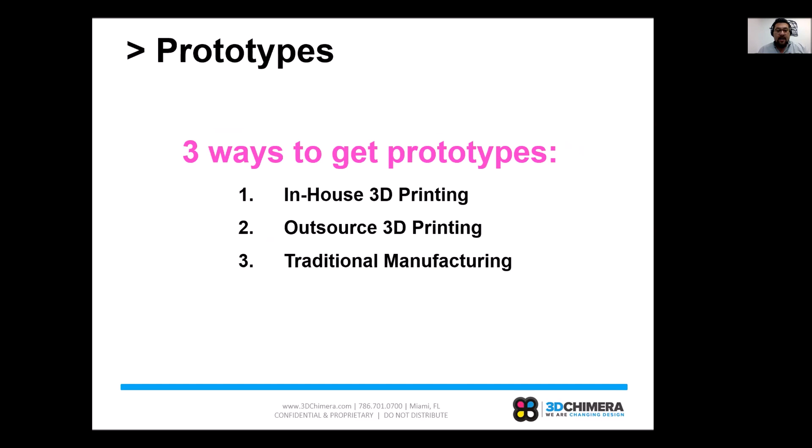Okay, so let's start with that first topic, prototypes. So in general, the way we look at it is there's 3 common ways to get prototypes. You can do in-house 3D printing, you can outsource 3D printing, or you can do traditional manufacturing. So traditional manufacturing is probably the most common. Most organizations out there have been doing this for years. It's kind of the way things have always been done.

So what does that look like? It's a Bridgeport machine, it's a milling machine, it's a CNC. Typically, these things require manual labor and manual programming. They usually require a highly skilled operator. So if your organization is large, perhaps that is a team that you have of machinists whose sole job is to work on these pieces of equipment and program the CNCs so that parts can get made. Perhaps you're a smaller organization, you might be outsourcing that expertise to a traditional house that's doing CNC type of work.

Now, what's tricky about that is the people who program CNCs have to be super skilled, which means that we've got to cover those costs as someone who's purchasing those services. In addition, it's a subtractive process, right?

So in traditional manufacturing, we're always starting with a block of material and removing material away, which means that we're effectively paying for waste material every time we buy a part. So there's a lot of hidden costs in traditional manufacturing that you might not see, but when you're buying perhaps a large block of ABS plastic for a CNC part, where you maybe only need fine details, but that's spread out over a large area, it can be a lot of material that's wasted.

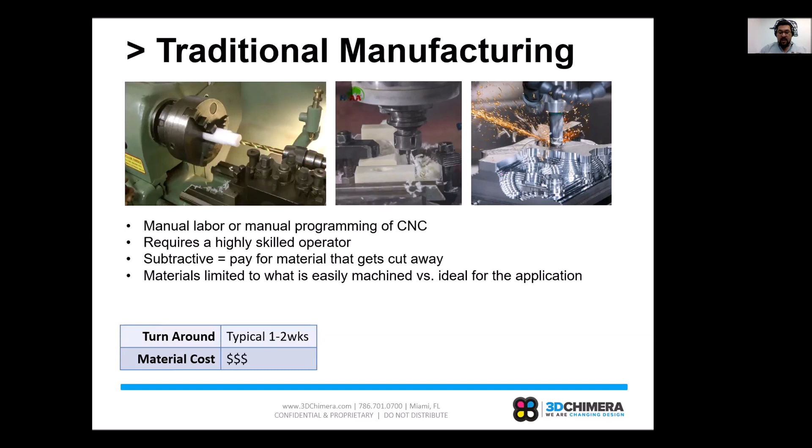And so we can flip that on its head if we think about how we can do that with additive, right? So we think about outsourced 3D printing. That's usually the first step that people do when they're starting their journey into additive. So you can work with service bureaus that are huge or small service organizations like 3D Chimera. In all of these places, the labor costs are going to come way down. So we don't have to have a CNC operator who went to university here to run 3D printers.

But the reality of working with any service organization is that that organization has to cover their overhead, and that is covered through service work. And so as you guys are outsourcing parts, you're effectively paying the overhead of another organization to do that. Typically, when you're outsourcing to a big company, they're printing on these super huge industrial 3D printers, which are awesome, but they have some shortcomings.

And a couple of those shortcomings are that you don't have as many material options usually, right? Because the service bureau is going to pick a few that work well for them to quickly turn projects. So you're stuck in that same spot that you might have been where you're outsourcing or even working in-house with traditional manufacturing, where you might not be able to look at the broad array of materials out there. And a lot of times these large industrial printers require proprietary materials.

So, of course, if you're working with 3D Chimera, that's a little different. We're a small team and we can be flexible and we can work with unique materials. But if you work with some of the bigger players out there, those materials are going to be proprietary. And what does that mean? That means that there's not a lot of options, but it also means they're not super cheap. So when you run these big machines, they work fantastic and they're very reliable, but the raw material costs are high and those costs get passed on to the customer when those parts are outsourced.

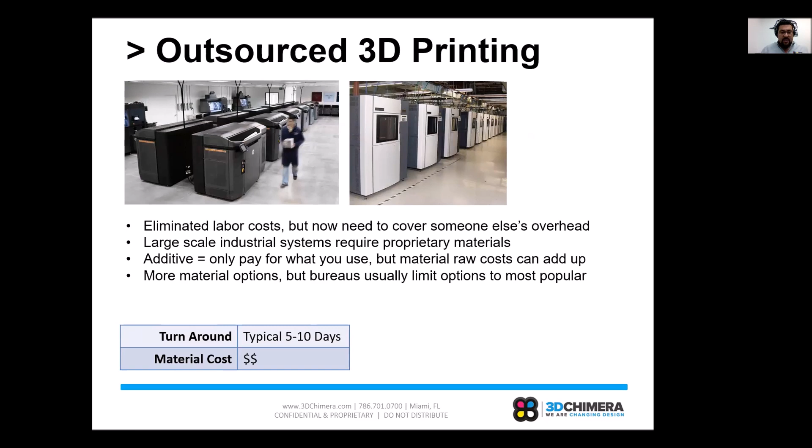So there are definitely advantages to outsource 3D printing, but there is another way, and that way is the way that we're usually the most excited about, and that's the idea of in-house 3D printing. So this would be where you probably dip your toe into the water with outsourcing. You figure out the type of technology you'd like to bring in. With in-house 3D printing, you can bring in a printer that meets your needs.

So here across the screen, we have a pretty big variety of printers. So on the left side, we have the German RepRap X500. That's going to be a high temperature material 3D printer. This is where you're going to print your ABS, your polycarbonates, your PEEKs, your Ultems. It's got a very large build volume. So this is a super flexible system for high temperature materials.

In the center, you have the Sintratec S2 3D printer. This is going to be an SLS 3D printer. So you're going to get the advantages of nylon or TPE powders, very fine details, and a pretty big volume here as well. And then on the right, you've got the MakerBot Method X and Method. Now these printers are fantastic. In the Method system, you're effectively getting the quality of an industrial 3D printer, but just shrunken down on a smaller scale.

As some of you guys might know, MakerBot was recently acquired by Stratasys, and so lots of that technology is actually implemented into the system. We're very excited about that today, and I'm sure that Camille will be able to highlight a number of different ways that technology might be able to help you guys in the future.

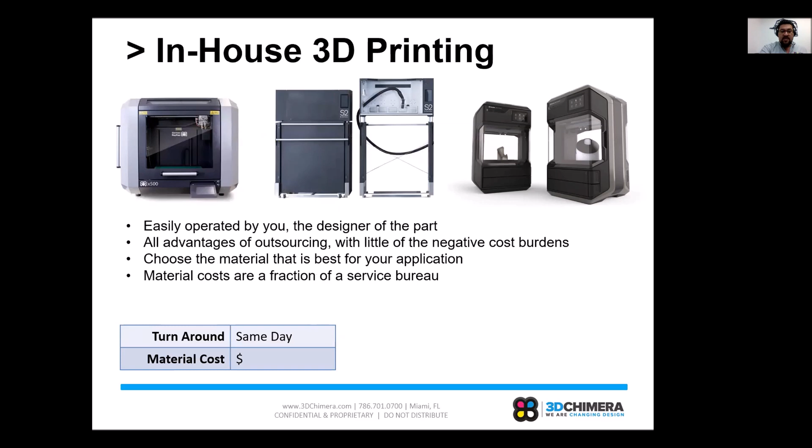There's another hidden benefit there, and that is that the reality is that in the open material market, materials are significantly less expensive. So you're going to be able to actually save money, not just by using only the material that you need, but actually only having to pay a fraction of what even the service bureaus are paying for their raw materials. So it can really be a huge advantage when you start to look down at the numbers for doing in-house 3D printing.

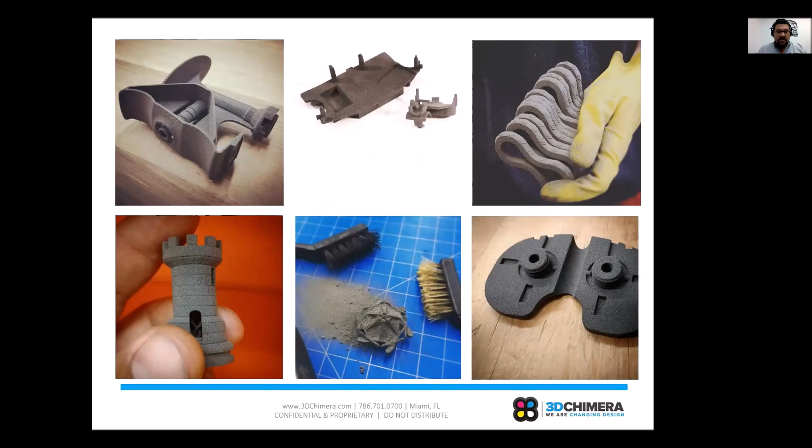So I just wanted to share with you guys a few examples of what 3D printed parts can look like. So here, these are all just detailed parts that came off of the SLS 3D printers from Sintratec. So these are going to be your PA12 parts. You can see really fine details here. It's a powder-based process.

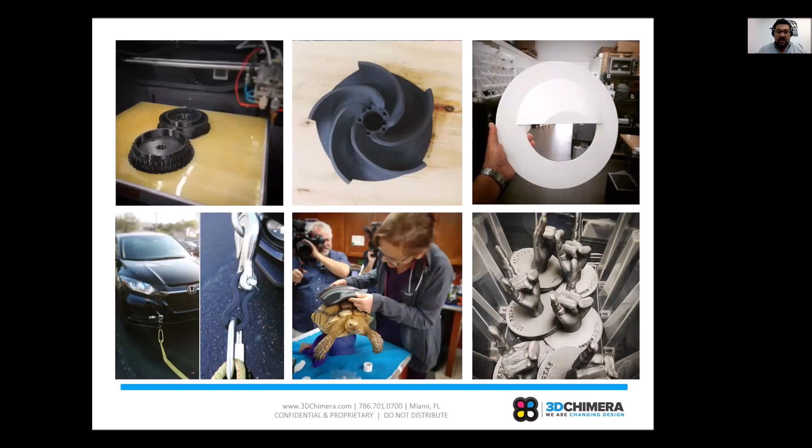And then these are some examples of the types of parts you can get off of your FDM or FFF style 3D printers. These are going to be your MakerBots and your German RepRap 3D printers. So you can see the variety of parts: parts for strength, parts for function, parts for fit checks, parts for aesthetics. There's a lot of different stuff that you can use it for.

So, as you think about how you can grow your business with prototypes, there's really two big things to think about. The first is a fast turnaround time, right? So if you can make more prototypes, that means you can iterate more.

That means you can build better products, right? It also means that you're going to be faster to market and you're going to have way less design risk, because you're going to have the ability to make more prototypes than just that one-off prototype you might have done with traditional manufacturing.

So, the big questions to look at in your organization are: what is it worth to reduce risk for your company? How much would a major mistake that you find in maybe your second or third round of prototyping cost an organization if you don't catch it? Additive can solve those types of problems and reduce that risk. Sometimes that's difficult to quantify, but try and think about that.

For your organization, have you ever had a time where a prototype could have found a mistake before it happened? We've had customers who have been able to identify problems that would have cost them entire containers' worth of materials ordered from overseas that would have been scrapped. They catch those things early in the prototyping stage so that when they get parts back, they're exactly what they expect.

And if you're thinking about time to market, what is the value of being first to market in your industry? If you're working on something new, you can iterate faster. Your competitors are taking weeks to build their prototypes, and you're building them overnight. You're going to hit the market faster, and that's going to give you a larger share of the market right from the get-go. So think about what that is worth for your team, and would an investment in additive allow you to unlock that potential?

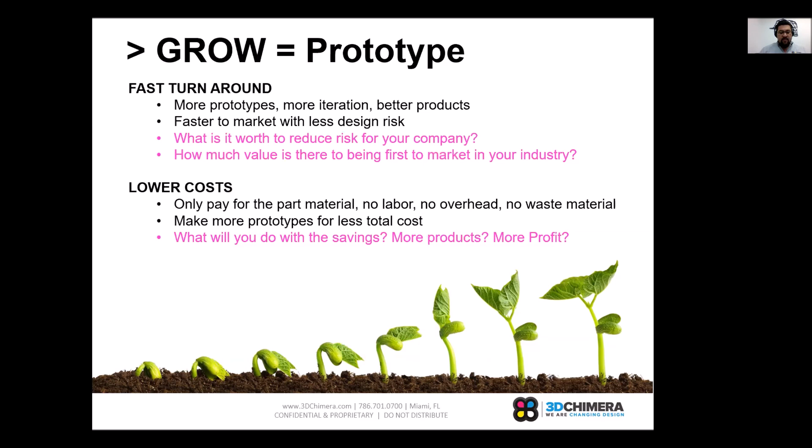So moving on to the next topic, let's think a little bit about tooling. In tooling, there's a whole variety of things: you've got tooling, jigs, and fixtures. The old school way is similar to how we prototype. With traditional manufacturing, you're going to have those long turnaround times, high costs, and high labor involved.

And today with additive, we get all those benefits we were just talking about with prototypes: fast turnaround times, lower costs, and low labor costs. But what's really interesting, maybe the most interesting thing, is that now we can focus on the new materials that are out there to build our products from.

Carbon fiber reinforced materials, nylon reinforced materials, electrostatic discharge (ESD) materials, materials with super high temperature ranges or super high chemical resistivity, perhaps parts made of polymers that are optimal for non-marring a surface or protecting a surface during a check fit. So there are a lot of hidden benefits to utilizing additive, particularly additive with polymers, in tooling, jigs, and fixtures that sometimes fall beneath the radar.

A lot of that's because in traditional manufacturing, we send stuff out for tooling. Those tools are usually made out of steel or aluminum, and that's great. It's durable and works well, but it costs a lot and takes a lot of time. With today's technology, we can actually produce parts out of polymers and get incredible results. So opening up your mind to implementing a polymer solution with additive for a tooling application can really change the game.

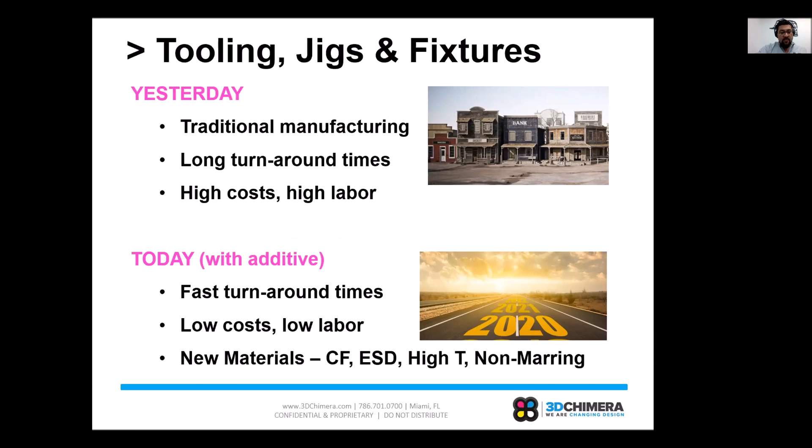So here are a few examples of where polymer additive manufacturing has been used to help with tooling, jigs, and fixture applications.

So on the upper left here, you have a casting application. So this is where you're going to 3D print the master pattern, and then you're going to do traditional sand casting, and you're going to be able to produce a part out of metal.

But instead of forming that master pattern out of a CNC component, or sometimes those are made out of like a handmade tool that then is done with a wax form, we can actually just 3D print those parts on demand, and then we can cast our parts and get functional metal parts on the other side. So you don't have to really completely change your process. You're just simply replacing a component of that with additive.

So to the right of that, we have another really interesting application, and that is for vacuum forming. So a lot of organizations use vacuum forming. It's a great technique because the materials are super inexpensive, and you can get some very interesting shapes and geometries just by simply heating a sheet of plastic and sort of sucking it down. And what's really cool about additive is that we have materials that can withstand those temperature ranges of those hot sheets of plastic coming down.

So maybe you don't need to fabricate that tool out of aluminum. I see some companies using MDF and wood that's sort of stacked up and that they're kind of hand shaping. How much more precise could your vac form be if you were to design that in a computer, design that tool, and then 3D print it?

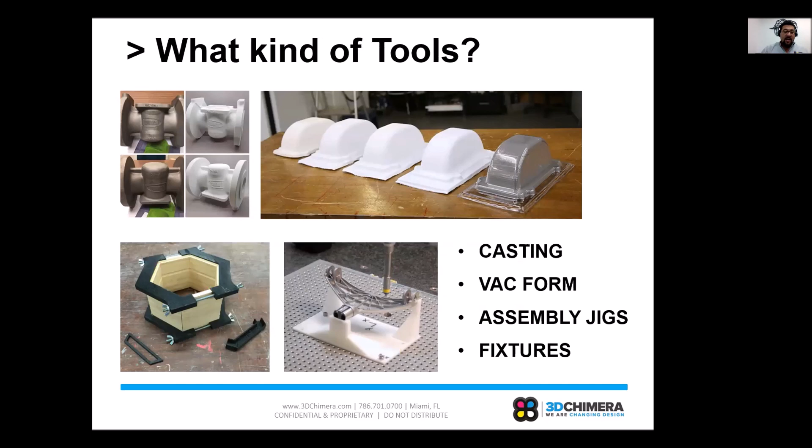So the low cost of additive can open up the applications for assembly jigs and fixtures where organizations maybe they're producing them traditionally, but oftentimes the organizations we work with weren't using them at all. And so by implementing additive, they're sort of enhancing their traditional manufacturing process as well. So it's a great way to think about modernizing your manufacturing process as we think about growing with tooling here.

Tooling wears out, right? So we can replace that with low-cost parts, right? So now all of the components that we've been dealing with that have been steel and aluminum, or maybe they're made of wood or some hand fabricated stuff from back in the day, we can replace all that stuff with components that are inexpensive with additive.

We can also produce tooling on demand, so there's no ramp-up time needed. If a part breaks, we can produce a part overnight. So think about that: if a tool was to break on the production line and the whole line shuts down, what does that lost productivity cost your company now?

If you lose a day of productivity, it's usually not the cost of the part. The cost of the part is irrelevant. What I've seen with my customers is when a tool breaks down, they will expedite that, they will rush order that, they will overnight that part because they're losing thousands of dollars an hour, because that part doesn't exist. If you can produce that part on demand, you can get it the same day, the next day. What is that worth? It could be worth huge amounts of value to your organization.

In old tooling, often we have workarounds because there's no easy way to reproduce it. So you have a tool, but there's something that you've kind of built by hand that kind of works with it, and it's not super efficient, but it gets the job done. With additive, we can actually build the ideal tool. We don't have to compromise and use what we've got. The ability to produce parts is now inexpensive and quick.

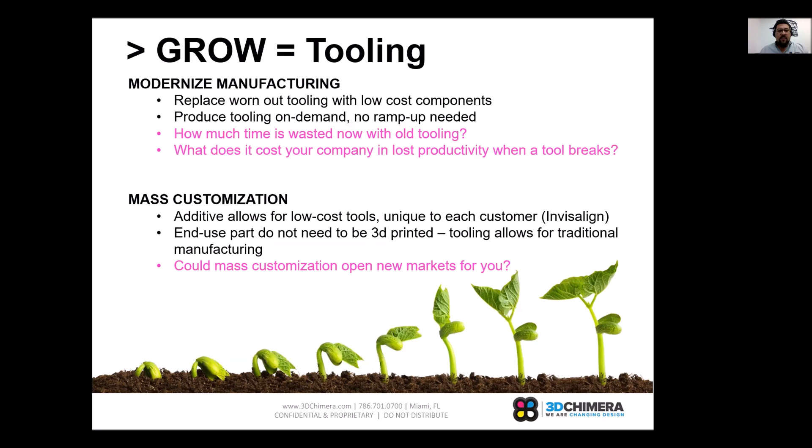And then finally, the idea of using additive to reduce inventory. Traditional warehouse: if you're working in a company that has products, everybody's got a room that looks like this. It's shelves, it's bins, it's bags, it's labels, it's confusing, it's expensive, it's a large amount of square footage. What if we can replace that with just-in-time manufacturing? Customer orders a part, we make it and send it to them next day. You can't get much more efficient than that.

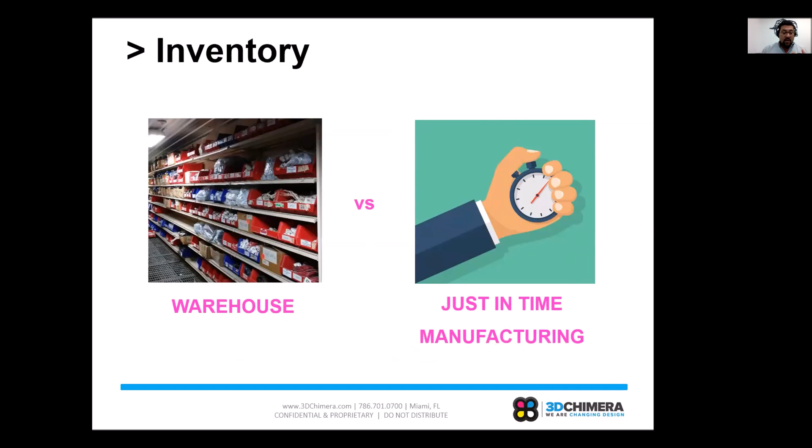That means we eliminate holding costs, inventory costs, even square footage costs, warehouse space. Of course, it allows us to free up cash. All those carrying costs are gone. We're just producing parts with additive, which could actually be less expensive than some traditional manufacturing. What could that cash flow do for your business? Our organization is a small business. What matters to us is cash flow. That's how we survive. A lot of businesses operate like that.

If you can increase your cash flow, could that help your business? Could you have that cash available to invest in other ways, so it doesn't get invested in inventory sitting on the shelf that maybe one day will come back to you? Or can you free up storage space? If you can get rid of all those shelves, can you increase your productivity on your production line? What is that worth? What is a square foot of productivity worth for your organization?

So these are some of the big picture ideas that we like to have folks think about as you're considering bringing in additive. Hopefully these three different ways can help you open your mind and see perhaps some unique ways that additive might help you grow.

What I'd like to do now is give you a quick demo and tour of our office, and then I'll flip things over to Camille. If you have any questions, this is a great time to type those in. I'm going to grab my laptop and walk you around our office here a little bit.

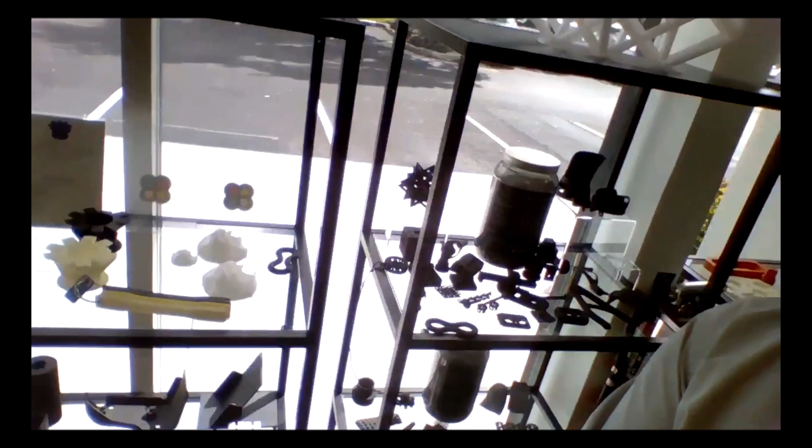We got all sorts of really innovative and interesting sample parts here. So here's a lot of SLS parts, all sorts of detailed parts and applications. Here's a lot of FDM parts over here that you can start to see there. We've got one of the new Sintratec S2 printers over here, which we are super excited about. So if you're looking to do large scale SLS, we've got that in-house.

Back here, we have some of our German RepRap 3D printers. For those of you guys who've been on some of our webinars in the past, you've probably seen me go into the back. We're not going to do that today, but we've got the giant printers, the X500 and X1000 as well. Then up here is the newest addition to our team. This is the MakerBot Method X.

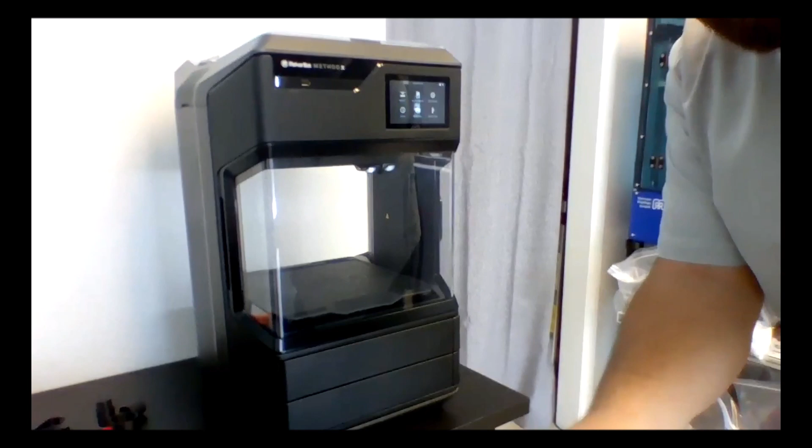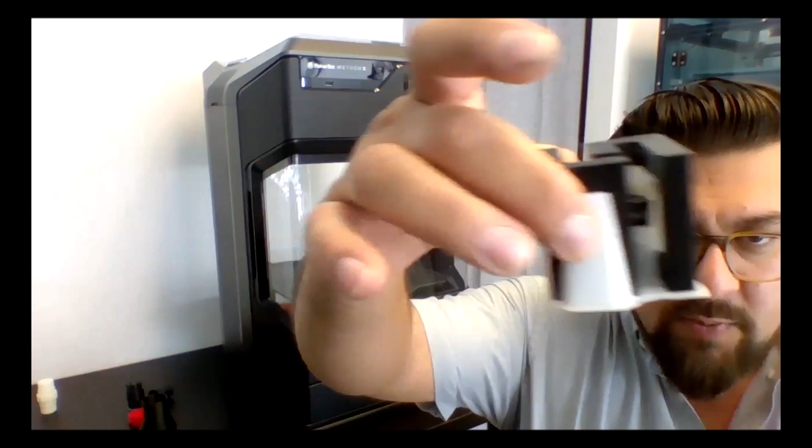So I wanted to show you guys this in person. I know that Camille will be giving us a little bit of a tour of it digitally, but it's always nice to see in person. I wanted to show you guys some parts here. This technology is really, really cool. So, we're still producing FDM parts like we traditionally have done with a lot of our printers. But what's unique about this system is that it has an incredible ability to produce support, right?

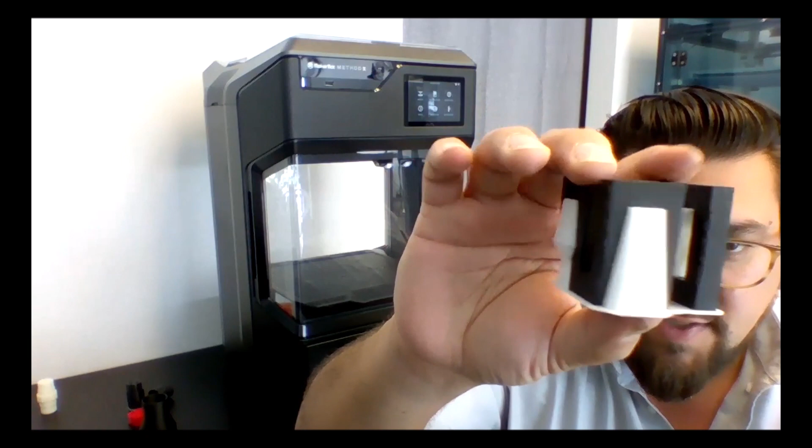So for those of you guys that are familiar with additive and have maybe worked with Stratasys machines in the past, this will look familiar to you, these types of complex support structures that dissolve out. This is actually the same dissolvable support that's used on the Stratasys machine. So if you've got a Dimension 3D printer or you've got a Fortus 3D printer and you guys are dissolving support out of that, the SR30 material, same thing runs on this guy, right?

So from something like this to something like this, the surface finish is incredible. The quality is incredible. You're going to find that it's going to be your go-to 3D printer. Even we were surprised. We were excited about this machine. When we brought it in, it's become our go-to machine. We use it for projects all the time.

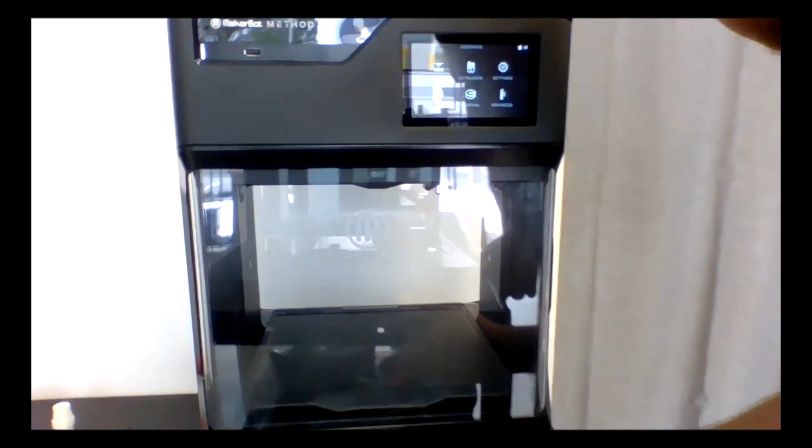You can see here, this is a Raspberry Pi case that we worked on for a customer. All sorts of fun stuff that can be done with this technology. Threaded components that have to go together, nest together. So all sorts of good stuff. The machines themselves are pretty awesome. You got a touchscreen display here, super high resolution, easy to navigate, walks you through the whole process.

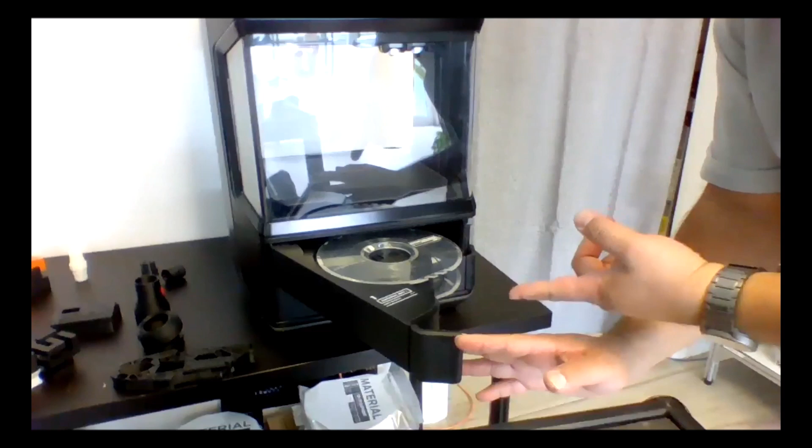And there's some pretty cool hidden features here. So there's material bays in here that are actually sealed to the environment. So, we're down here in Miami, it's highly humid. This keeps the materials dry, which you guys probably know from some of our previous talks is super critical depending on the materials that you're working with. The second bay here is actually the support material. So you've got support material built right into the system.

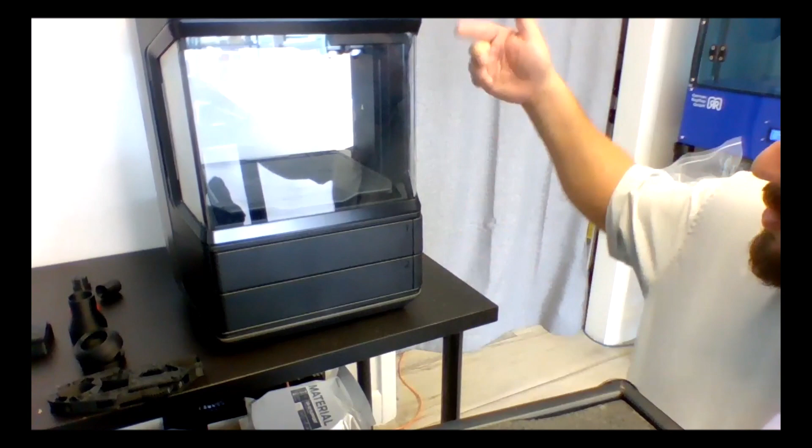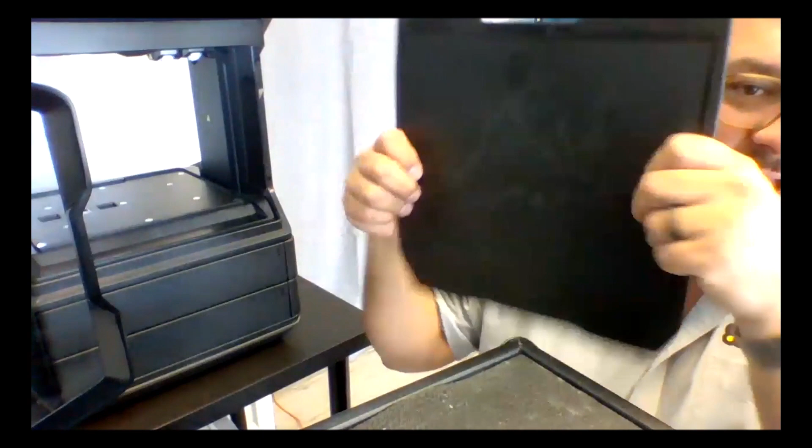Inside here, there's all sorts of hidden amazingness. I'm sure that Camille will touch on some of it. But the nozzles kind of move out of the way of each other. There's this amazing circulated chamber inside, which not many other 3D printers can do because of the patents from Stratasys. It has this pretty cool removable build plate, which is held on with magnets and a spring steel. So it's all the things that you would expect.

It's connected to the network, and it's got a camera inside of it, and it's surprisingly well designed, and it's absolutely designed for the manufacturing environment. So if you guys are looking to dip your toe in the water, it's something that we recommend checking out, and hopefully we can learn a little bit more about that and about a similar application here with Camille. So I'm going to actually flip over control to him in a moment here and let him share a little bit about AllAccess.

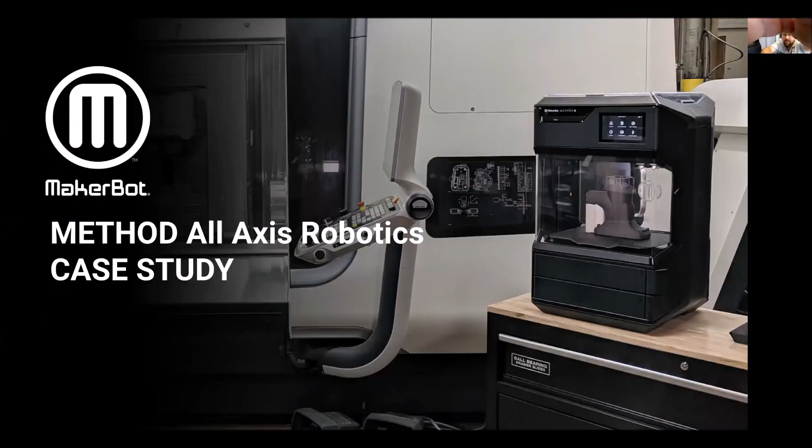Thank you, Alex, for giving us an overview on how businesses are taking advantage of 3D printing to improve overall. So this is the perfect live example, when Alex and I were talking about how businesses are improving with 3D printing, of a company that has improved thanks to 3D printing in all three of those key areas.

So first things first, I'm going to give you an overview of who All Axis Robotics is and how they came about. I'll give you a quick overview of who MakerBot is. Then we'll go into the value proposition of Method as a product so that you understand for All Axis Robotics why this technology was key in making them successful in those 3 key areas. And we'll close things out with some Q&A.

So who is All Axis Robotics? All Axis Robotics actually started out as All Axis Machine. Basically, they were looking to implement the best-in-class machine shop technology. So they had 5, 9, 11 axis CNC machines with the goal of creating a part in one machine cycle. And over time, through continuous improvement, they hit a wall where, because of their limited workforce and floor space, they weren't able to utilize 10 hours out of the workday.

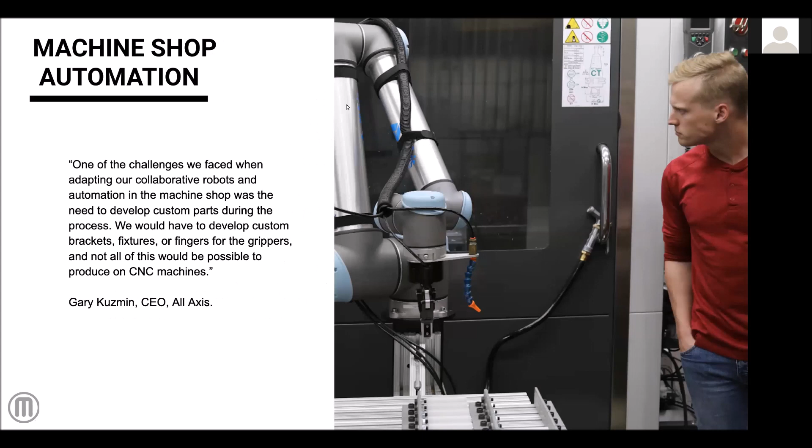So the objective of All Axis Robotics is automation. And automation results in better quality due to the discipline required to implement that automation. It really removes the uncertainty and the variability that's associated with manual labor. So that's pretty much All Axis Robotics in a nutshell.

Now let's talk a little bit about MakerBot. MakerBot was one of the first companies to put desktop 3D printing on the map. It started out in 2009, and as you can see, it was very much a hobbyist slash tinkerer type of technology. It was a kit made out of balsa wood that you had to assemble yourself, and for the first few years, that's really what MakerBot was, just a tool that enthusiasts in the industry were using.

And over time, we improved our technology incrementally and we created the first mass-produced desktop 3D printer in the Replicator 2 in 2013. This is the printer that really put MakerBot on the map. And as Alex mentioned, the largest 3D printing company, the company that invented fused deposition modeling, the type of additive 3D printing that MakerBot uses, Stratasys, acquired us in 2013.

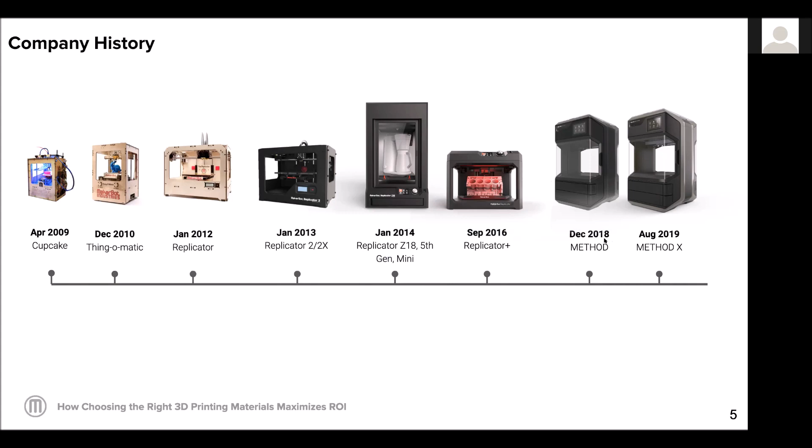Soon after the acquisition, we already had products in development that we launched, which were the Replicator Z18, the 5th generation, the Mini, and the Replicator Plus. And with the partnership of Stratasys, over those 5 years, we were developing the next generation of 3D printers. That's Method and Method X, the solution that Alex shared with you today, that we're very excited about because of the 21 industrial patents that we're leveraging from Stratasys.

So Method X is the printer that I'm going to be showcasing in this presentation. It's the one that All Axis Robotics is heavily using throughout their process. Method X is bridging the gap between the desktop printers that MakerBot had been creating in the past and the industrial 3D printers that Stratasys have had all along.

One of the 21 patents that we're leveraging from our parent company is a circulating heated chamber. So what is the value of a circulating heated chamber for the end customer? Basically, there's consistent heat throughout the entire printing process. For most 3D printers on the market that do not have access to this patent, when printing in plastic, the most important component to have control of is heat. And the way they try to control heat is by having a heated build plate, which is great for the first few layers of the print.

But as the object is being built, the layers that move away from the heated plate no longer have that consistent heat. And because of that, you'll just see shrinking, warping, and curling. It's material science. By having a circulating heated chamber, we're controlling the rate at which the part cools.

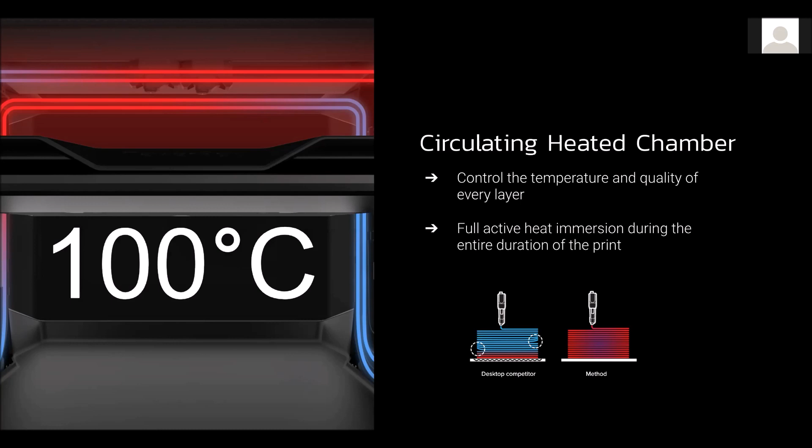And what the value is for you as a customer is a part that's dimensionally accurate. That means that when the individual has a design in CAD in their software, it meets their measurements once it's 3D printed. It doesn't shrink very much. And that tolerance is plus or minus 0.2 millimeters, which is around the capabilities that industrial 3D printers today, the Stratasys units, have, but at a much more affordable price point, a more accessible price point.

Another key feature that Alex mentioned is soluble support material. This is where we're also leveraging our parent company, Stratasys. We're using their soluble support material, which is called SR30. And it just has superior layer adhesion to the main material being used in industry today, which is ABS.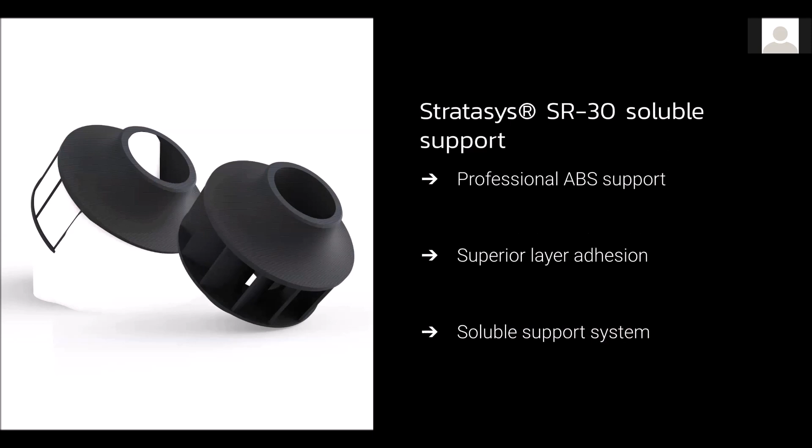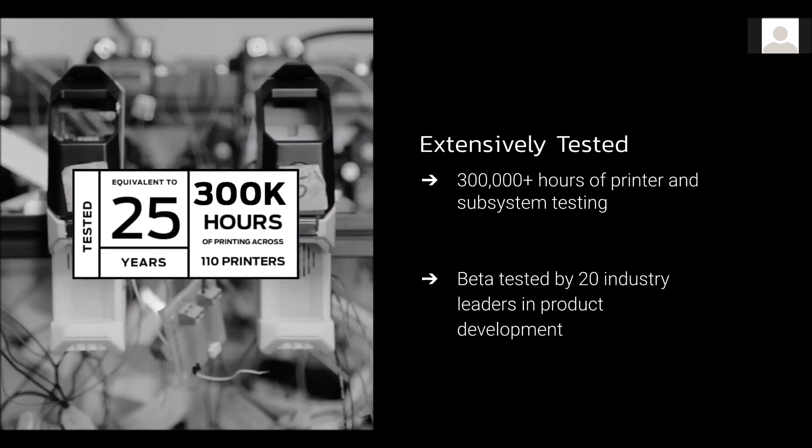Outside of that, Method has gone through unprecedented testing. Since MakerBot has been known as more of a hobbyist technology or a printer that's being used in schools and in K through 12, one of the things that we absolutely needed to do when launching this product is showing that this is a tool that's being used by professionals. And we went through a very rigorous testing process. Over 300,000 hours, over a hundred 3D printers was tested before going to market with the Method platform.

The Method platform has two printers. The main difference between the two printers are Method has a 60-degree chamber, while Method X has a 100-degree chamber. And what that does for you as a customer, it's just a difference in the materials that you can use. So Method is optimized for PLA, PETG, tough, PVA, and nylon, whereas Method X can do all of those materials plus ABS, ASA, and has a variety of other materials that we'll be able to do that require more heat.

But we're not limiting customers to those materials. One of the main things that Alex was talking about that's very important is we're an open material platform. So we allow customers to run any third-party material that they would like through this platform as long as it's able to print within our printing parameters. So a 60-degree chamber for Method, a 100-degree chamber for Method X, and extruders that can reach up to 300 degrees.

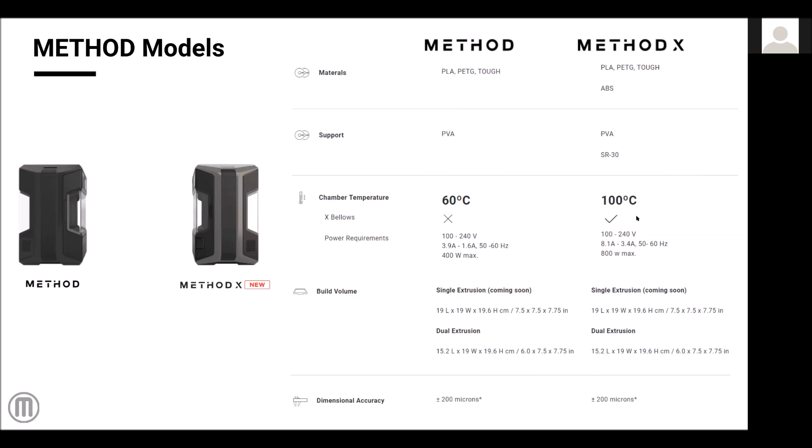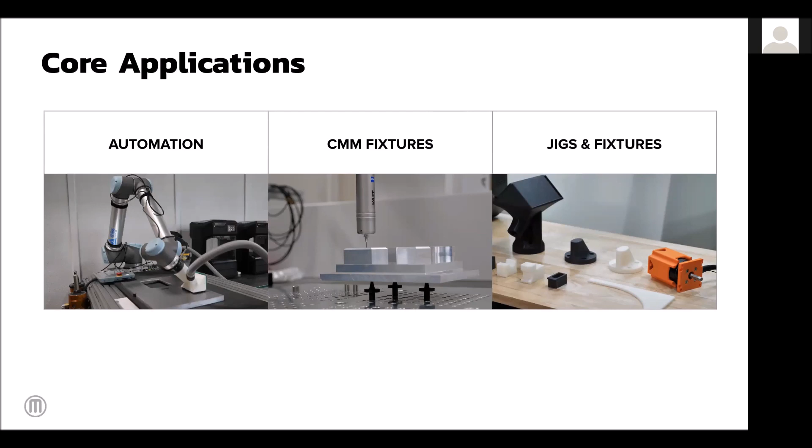So now let's get into the meat and potatoes of this presentation, how this platform is being used with All Axis Robotics. And they were using it for prototyping, specifically to create parts that they put on their robots, so end-of-arm effectors. They used it for a variety of different jigs and fixtures, specifically their CMM fixturing, as well as a variety of other jigs and fixtures in their shop.

So hold on one second.

So the key part that made All Axis Robotics inquire about Method is they were looking to create an end-of-arm effector that was going to sand aluminum. What All Axis Robotics is all about is automating processes that are very laborious, that don't create the best working environment for the machine operator or the person that needs to do that job. And sanding aluminum with brute force and the particulates of those shards of aluminum being in the air isn't the best working environment for that individual.

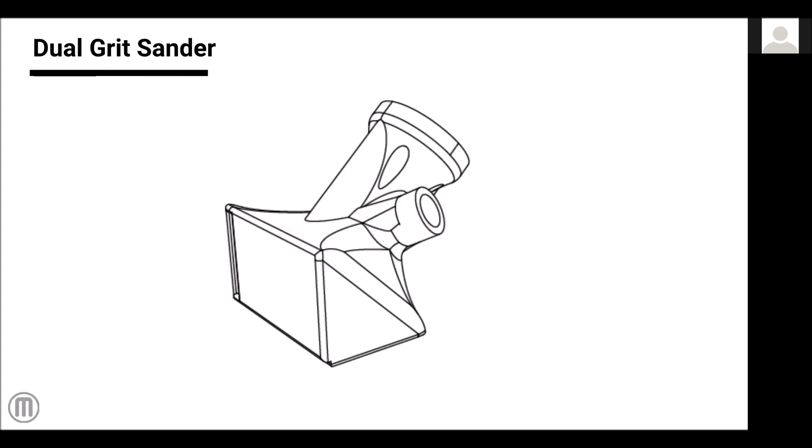So they decided to create an end-of-arm effector that could do that process to automate, and for that individual instead to learn the skill of figuring out exactly how to automate that process using this part. So when thinking of this dual grit sander, this was the design that they came up with. And looking at this, it's going to be a very difficult part to machine. It would probably need to be machined in 2 or 3 parts and welded together. So they started exploring 3D printing as a solution to potentially make this part.

And they did a very quick cost analysis of doing it with their in-house CNC versus using the MakerBot Method X. The main differences is with their CNC machine, they would have to take a machine out of production. They would have to take one of their best machinists to figure out the CAM software. They would have to spend a large amount of time preparing the tool, and then they would have to run the part.

They estimated that it would cost them a little over $3,600 just to make and weld this part. Whereas on Method X, preparing the part to be 3D printed only took about 5 minutes. So they chose their printing parameters and just hit print. Material preparation or preparing the printer was minimal as well. All they needed to do was load the material into the printer, and the printer took 44 hours to print the part as well as dissolve away the support material.

So all of this was being done without a machine having to be taken out of production, and the overall material cost of the part was $110. So within a couple of parts that they would make on Method X versus using their in-house CNC, they would get a return on their investment.

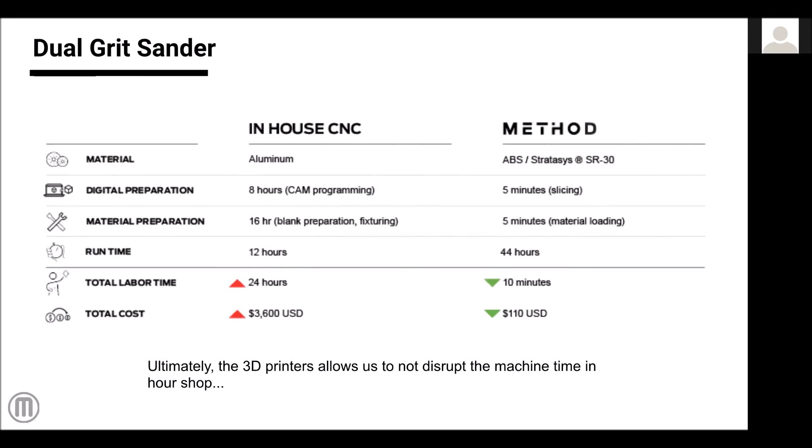The reason why Method was the best solution in terms of all the 3D printers that are out on the market was because of the part dimensional accuracy that I mentioned earlier that they're able to achieve thanks to the circulating heated chamber. So that means that they didn't need to machine the part in any way, shape, or form for it to fit on their end of arm effector. They didn't need to machine any holes or anything like that.

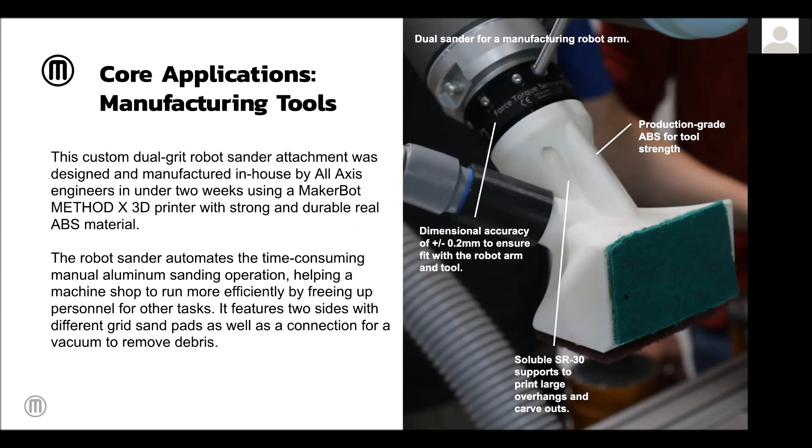There's an internal cavity inside the part that requires SR30 support material, and without SR30 support material, they wouldn't have been able to create that vacuum to be able to suck out the shards of aluminum when going through the sanding process. So that's how All Axis Robotics used Method X to create this particular end-of-arm tool to automate this process.

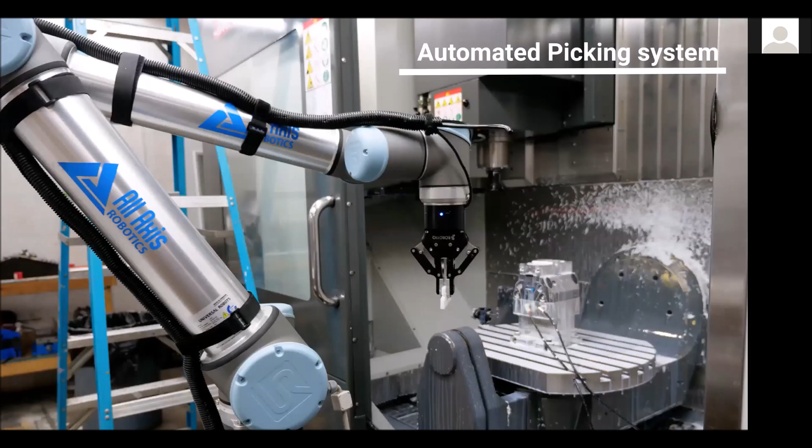Now, All Axis Robotics didn't stop there. Now that they found this first application to use 3D printing, they started exploring a variety of other applications that 3D printing could help them in their process. So the next application that they looked at was another custom end-of-arm effector, specifically for this gripper tool. So what they found is sometimes the standard gripper, the fingers, don't have enough friction to pick up the parts. So in this case, they were able to design a better end-of-arm tool to be able to pick up these pieces.

But where they saw the most value is a lot of these fingers experience a large amount of wear. And instead of having to keep inventory of replacement parts, they could simply print parts on demand whenever the fingers wore out. Furthermore, what they loved about the Method X is their ability to use third-party materials. They have a wide range of materials that they could use outside of ABS, things that are carbon or glass reinforced that do very well with impact and wear. So that's how they were using it for picking tools.

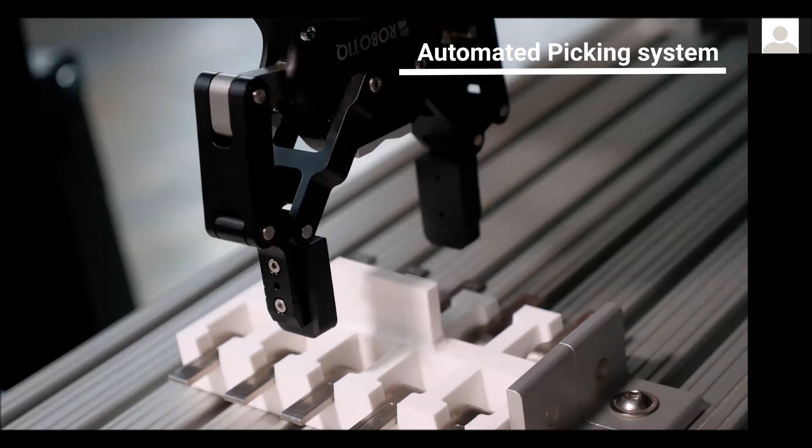Another really key application was with this fixture for a laser marking application. So previously to having the MakerBot in-house, they were simply just doing this application one at a time. And they realized that with Method X, they could create a fixture that allows them to do 10 at a time, which for them was huge. A 10x in productivity is fantastic. But the reason why Method X was the best solution for them in this application has to do with part dimensional accuracy. They really needed this fixture to be precise because it allows them to precisely locate each latch. Without that, they wouldn't be able to do this application repeatedly.

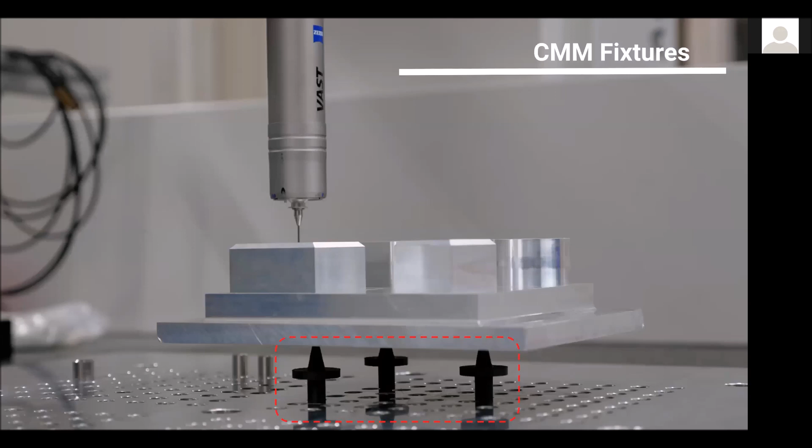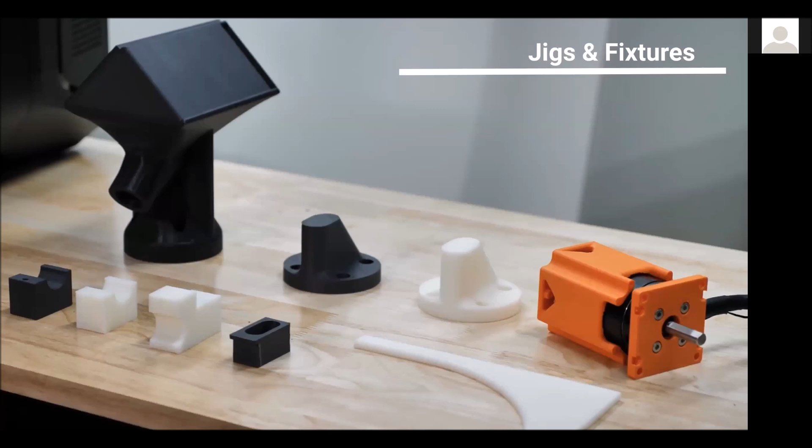The last application, well, not the last, but one of the last that I'm going to speak about is with their CMM fixtures. So All Axis Robotics considers themselves to be a low volume, high mix shop. So they were really struggling to think of creative ways to hold parts for their CMM machine. And Method X allowed them on demand to be able to design holding fixtures for their CMM machine. Now, over the past year, All Axis Robotics have been using 3D printing for so many different fixturing applications, as well as jigs, that it's opening up a whole new business segment for them where they're starting to do jigs and fixtures for other machine shops.

So I want to pause there, and I'm going to give control back over to Alex. But in a nutshell, this is a really good example of a company that started using 3D printing for a particular application. That application was prototyping. They wanted to prototype that dual grit sander. And then very quickly after implementing the technology, their engineers understood this new tool that they had at their fingertips that will allow them to design and produce parts on demand for a variety of other areas in their machine shop.